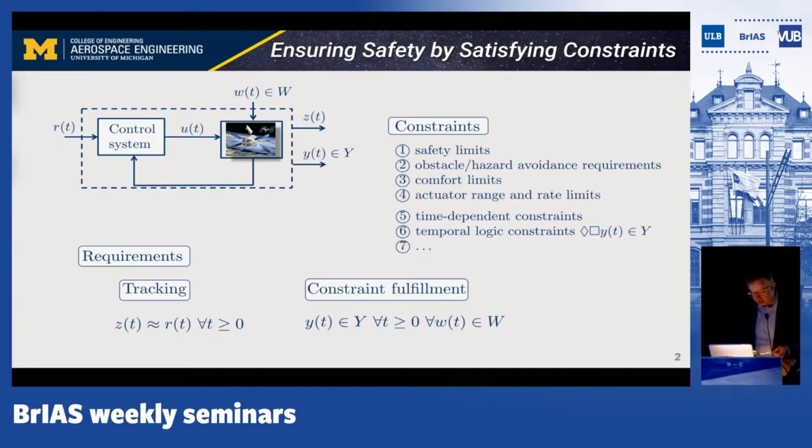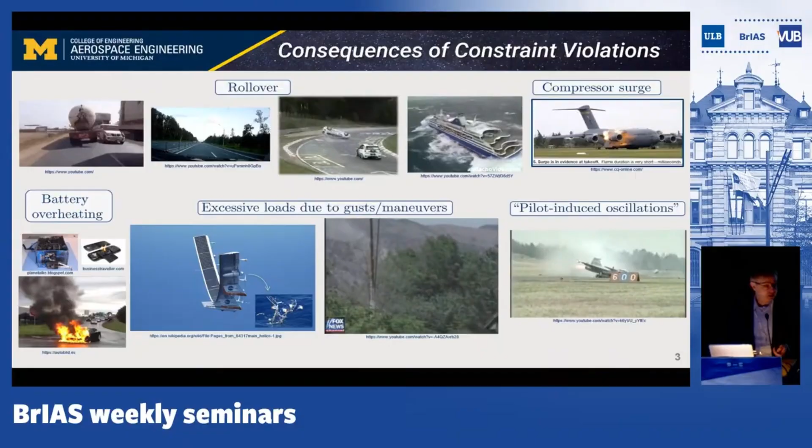Constraints can be more interesting too—they can depend on time in case of moving obstacles, or can be given by temporal logic expressions. We worry about constraints because bad things can happen if they're violated: cars and ships can roll over, aircraft engines can catch fire because of compressor surge, batteries can overheat, aircraft can disintegrate in flight due to excessive loads caused by maneuvers and gusts, and actuator control surface rate limiting can induce pilot-induced oscillations that can cause aircraft crashes—and that's what we would like to avoid.

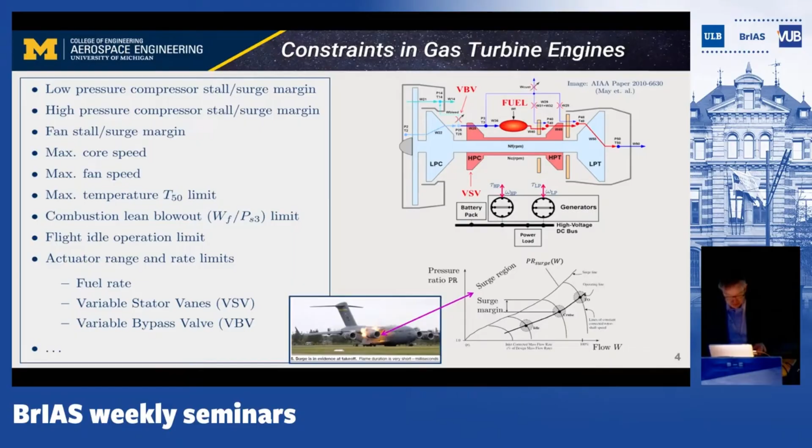If you take a flight, it's interesting that one system with many constraints is the aircraft gas turbine engine. There are surge margin limits, overspeed and over-temperature limits, combustion limits of various kinds, actuator range and rate limits. And as aircraft become more electric, you have to also worry about constraints in the electrical power system on currents, voltages, state of charge, and so on.

One of the most appealing tools developed in control theory for addressing constrained control problems is what's called model predictive control. In model predictive control, you generate control by solving a discrete time optimal control problem, so the feedback control law is obtained through optimization.

The way you enforce the constraints is by imposing those constraints as part of this optimization problem formulation. So the first element of this optimal control sequence that solves this optimization problem is assigned as your control action. So a couple of remarks here: typically you use iterative optimization solvers to find the solution, and you have to solve this problem in real time, and that's why computations are important.

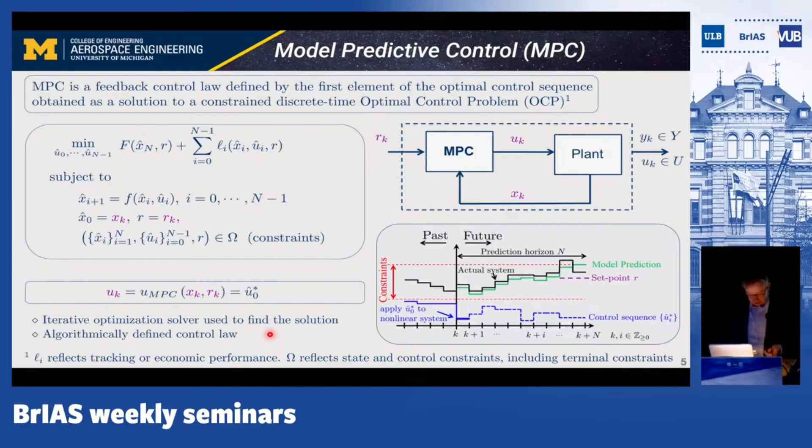Model predictive control has a long history. It emerged in the late 60s in academia and in the late 70s in industry, basically independently. It has been a vibrant discipline for academic research for several decades now, and it has been very successful in the chemical process industry, with increasing interest and adoption by other industries, notably automotive industry most recently. I showed a few examples where it was actually introduced into mass production.

Now, this is my introduction, and what do I want to do for this talk? First, I'd like to tell you a little bit about a few applications where we use model predictive control. Applications are always fun and give you a little bit more idea about some of the applied research that I do. And then the Achilles heel of model predictive control is in the computations, because you have to solve an optimization problem on board, and that's difficult. In fact, that's a major motivation for looking at alternative schemes, such as reference governors, a major area of research of Professor Garone, as well as barrier functions and control barrier functions that have become popular recently.

Hopefully, by the end of this talk, I'll convince you that there are a number of approaches to generate lightweight implementations of MPC that simplify the computations greatly. And so then you can take advantage of the fact that MPC is a very versatile framework that reflects performance objectives, handles constraints, and can have a low computation effort.

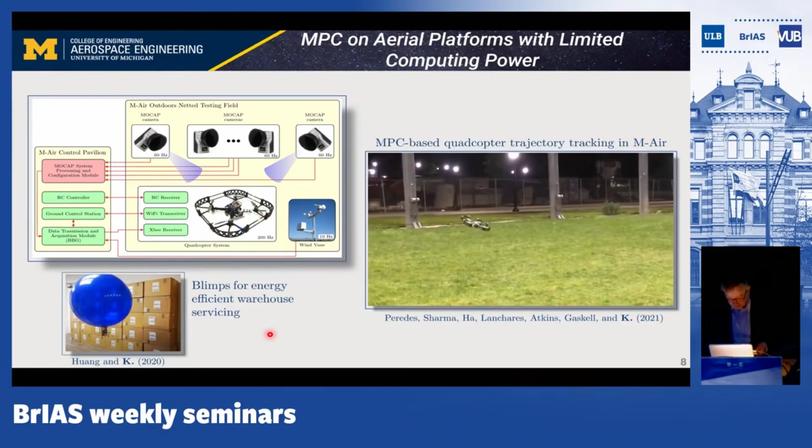Here is an even more significant challenge, both from a computational control standpoint, which involves control of aircraft with high aspect ratio flexible wings. Such aircraft are of great interest as high aspect ratio wings increase lift to drag ratio, and therefore they can improve fuel or energy consumption. You can also use them as high altitude, long endurance platforms, basically pseudo satellites. Unfortunately, these aircraft are also very flexible, and they can experience high deflections and loads as they are exposed to maneuvers and wind gust disturbances.

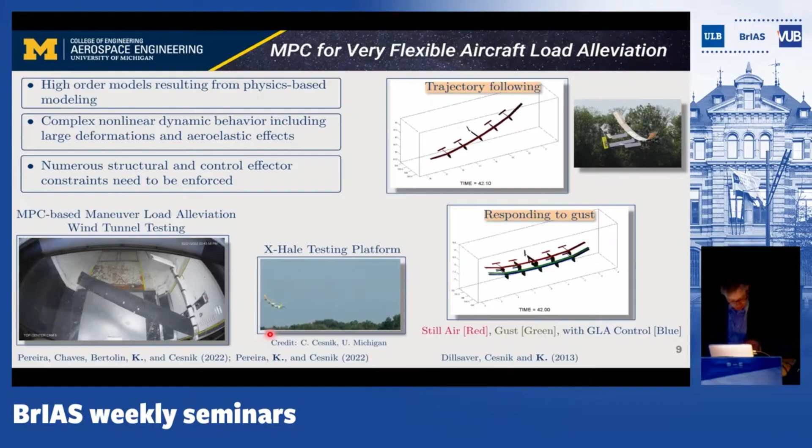MPC can also be used in spacecraft control applications, in particular for station keeping and rendezvous and proximity operations, notably on halo orbits in cislunar space between Earth and the Moon. To enable low fuel consumption during station keeping, there needs to be special formulations of model predictive control used, requiring accurate nonlinear models and non-standard choice of cost functions, which must be solved reliably on board the spacecraft.

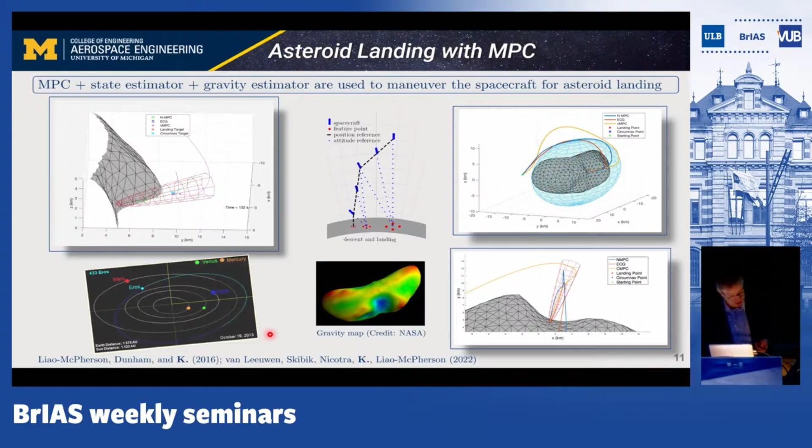We have considered the use of MPC to handle constraints in deep space applications, for example, for soft landing on asteroids, satisfying various constraints. If one wants to improve the ability to fly around and land on an asteroid, essentially without much knowledge of the gravitational field, MPC and adaptive control can be integrated together.

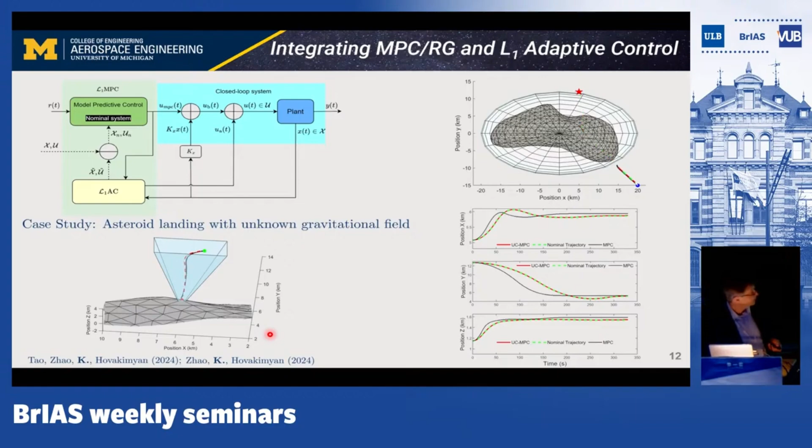I wanted to mention these developments because they happened under an AI planning grant from the National Science Foundation that Professor Bruno Sinopoli, who is the next speaker, has led. This work was in collaboration with Professor Pan Zhao and Naira Hovakimyan. Here we integrated L1 adaptive control to compensate for gravitational field uncertainty and model predictive control, as well as reference governors.

In other articles, another application for which we successfully exploited MPC involved the reduction in emissions of diesel engines, which are used to power trucks, ships, and interestingly, even some airplanes. The controller architecture that evolved was actually quite interesting, and it involved not a single MPC controller, but actually three of them.

Two of them were controlling the air path of the engine, basically the exhaust gas recirculation valve and variable geometry turbocharger. And the third MPC controller was an outer loop controller that would adjust the set points to these inner loop MPC controllers, as well as the fueling rate.

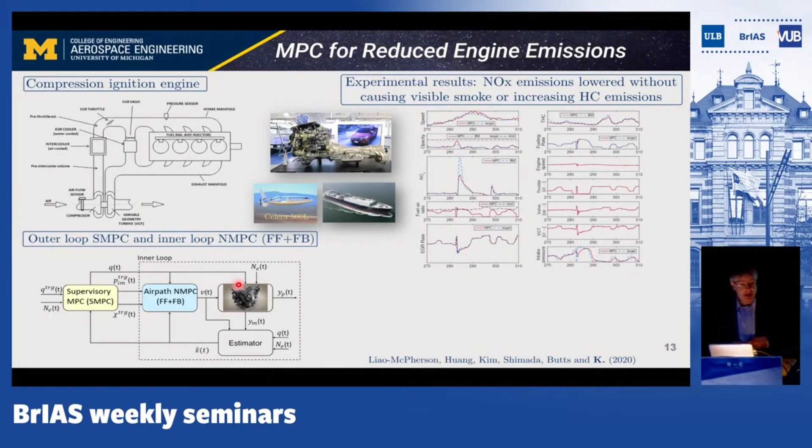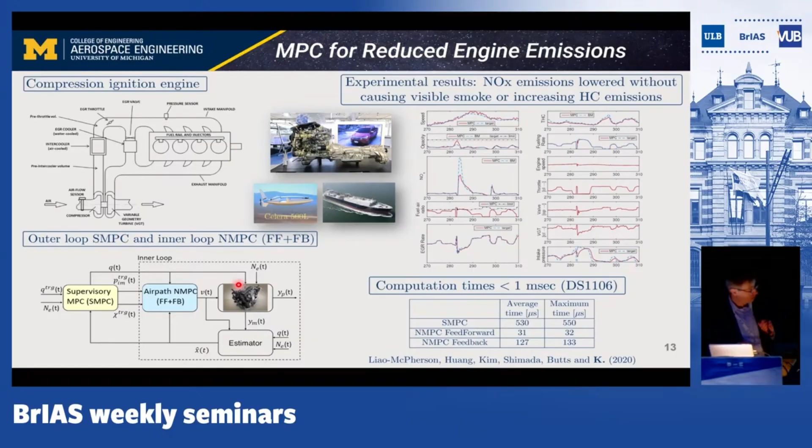While this architecture is quite complex, it enabled us to gain fairly good control over the engine transients, and we've been able to reduce transient oxides of nitrogen spikes, which is a difficult thing to do in diesel engines. What's interesting also is that, thanks to some of the ideas on the computational side I'm going to talk about, we've been able to maintain the total computation time for all three controllers under 1 millisecond per time step.

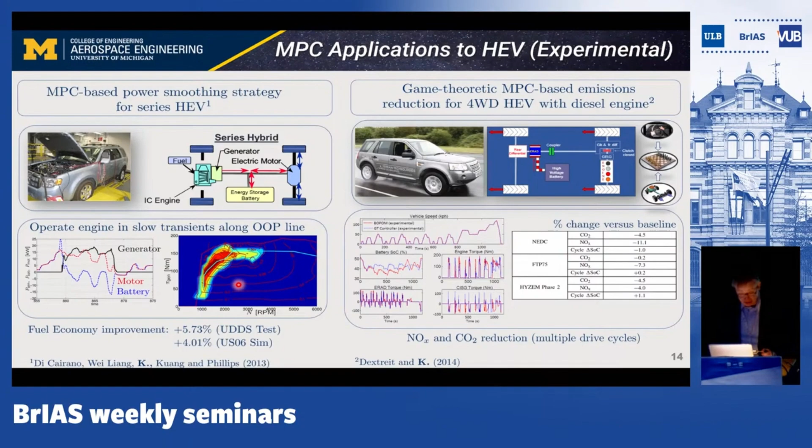There have been a number of applications we looked at to hybrid electric vehicles that exploited interesting ideas and interesting cost functions in optimization, including those based on game theory.

Broader use of game theory we also considered in applications to autonomous driving. Here what we worry about is interactions with human-driven vehicles, in particular in scenarios where an autonomous vehicle has to take into account these interactions. If the autonomous vehicle is trying to merge into very dense traffic where there are a lot of other cars, it has to nudge its way in. So you have to have predictive models that somehow account for the reaction of human drivers. Game theory provides a way of modeling these interactions.

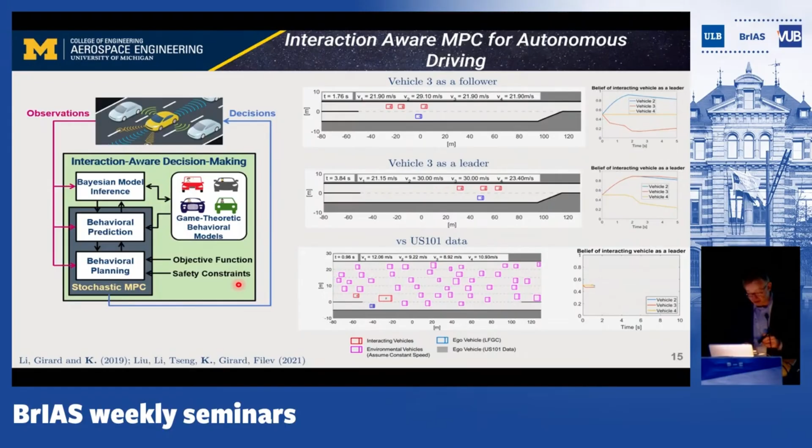What we typically do is we don't use a single game theoretic model, but multiple of them. Based on the history of interactions, a few seconds of interactions, we adjust the probability of each of these models being assigned to a particular vehicle. Then we use stochastic model predictive control to actually optimize the trajectory of our autonomous vehicle in such scenarios.

More recent work, I'm not going to dwell on it too much, but that included taking into account perception uncertainty. If you have a camera-based system, you rely on computer vision to drive in traffic. You have to account for uncertainty, for the errors in this perception system. That's a long-standing challenge. Also, perception systems are often based on neural networks, typically machine learning based systems. The other challenge is that you have to take into account...

Let's see if I can click. I don't think the video is playing.

That's okay. You have to keep into account what's known as out-of-distribution perception, meaning that you might encounter driving situations during regular driving which were not present when you trained your perception system. So we use deep ensemble type techniques to handle out-of-distribution perception. If this video was playing, you could see that we are basically testing, in an environment with rain and bad weather, a system that has been trained in sunny weather. This is in CARLA simulation.

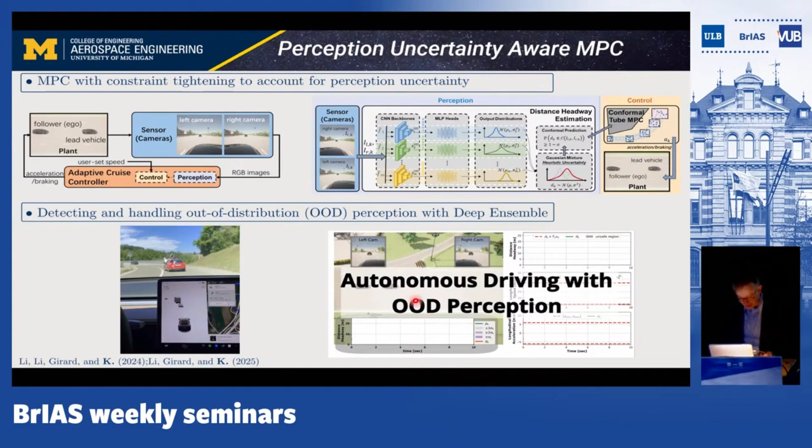Now, there was a very nice conference here last week on batteries. We've also been looking at battery control problems more from a higher level systems perspective, and on aspects that involve thermal management. Thermal dynamics in vehicles tend to be slow.

The temperatures don't change very fast. And what it means is that if you want to prevent the exceedance of limit on the battery temperature, and you have control over the cooling system, you have to pre-cool sufficiently far in advance to avoid this constraint violation, sufficiently far in advance of some kind of load increase or acceleration of the vehicle. So you need a long prediction horizon. You need to look long into the future.

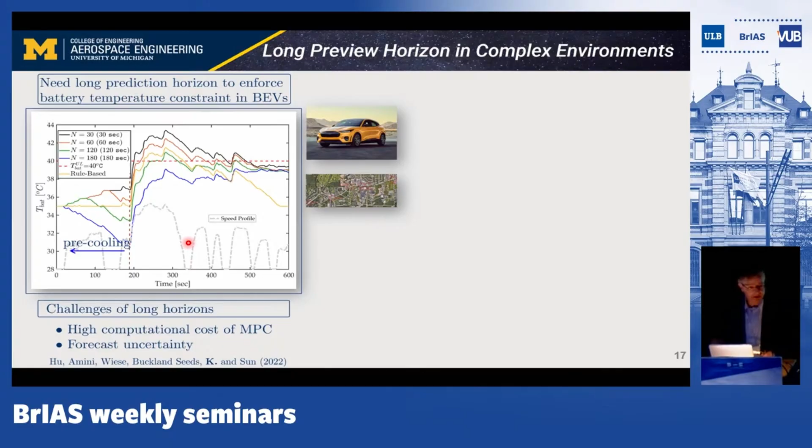And there are two issues there. One is that MPC has high computational cost. And the second is the forecast uncertainty. You need to know what the vehicle speed and what loads are going to be to predict the thermal loads on the vehicle. And you need to predict, say, the vehicle speed 5 to 10 minutes ahead to be successful. Initially, we were skeptical whether we can do this long-term prediction of vehicle speed, but it turns out, based on historical data, that if you combine queuing models for short-term prediction and then neural network and Bayesian network models for longer-term predictions, you can make good progress on this problem.

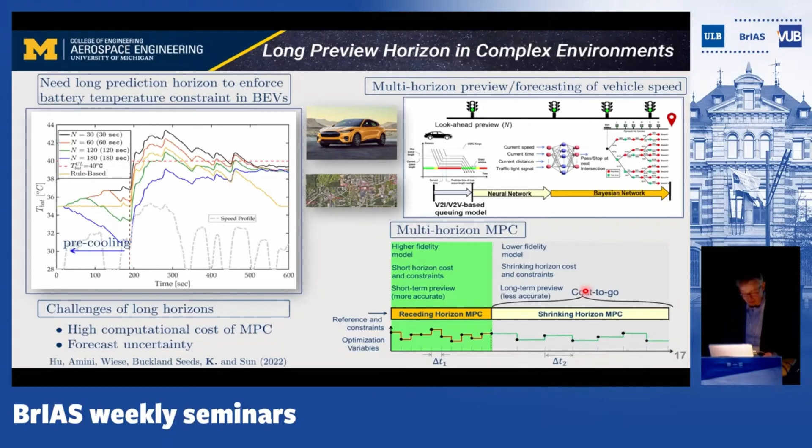Then you can develop special variants of model predictive control, what we call a multi-horizon MPC, where you have different phases: a receding horizon phase and a shrinking horizon phase. In the shrinking horizon phase, you can use a lower fidelity model, you can use less accurate preview, and that helps reduce the computational cost. We've done work developing this multi-horizon MPC formulation.

Now I've given you a few ideas about applications. Computation in all of them is a serious limiting factor in terms of the type of solutions we can deploy. We have to worry about the computations. And so the need to address this Achilles heel of MPC has motivated us to look more systematically into computations and model predictive control. I'd like to tell you a little bit about some of the research we've done in this area, broadly categorized into 3 different directions: 2.1, 2.2, 2.3.

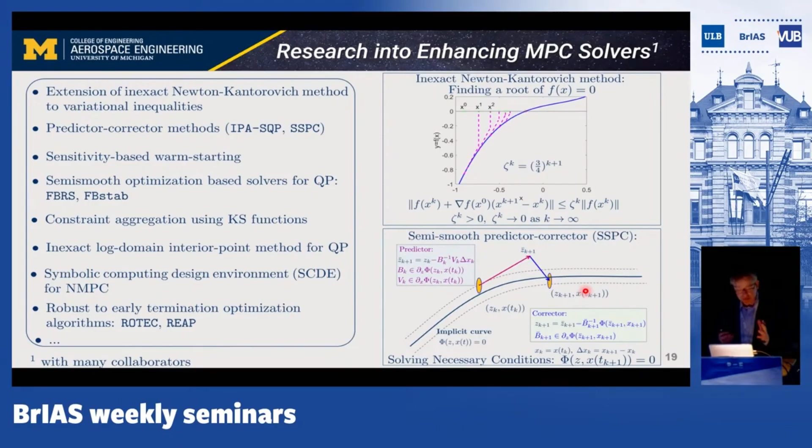Our first set of approaches was to look at developing solvers, computational solvers, specifically tailored for MPC problems. They would be faster, exploiting special features of these problems, taking advantage perhaps of warm start. This is work that involves many different ideas, work with many collaborators. I could probably give a number of talks on these ideas. I'll just briefly mention 2 of these developments.

One of them is what we call the inexact Newton-Kantorovich method for model predictive control. This goes all the way back to the classical Newton's method for solving nonlinear algebraic equations. So I have a smooth equation, f of x equals 0, and I want to solve it. How do I do it using Newton's method? You take a guess for the solution, x0. You linearize your nonlinear equation, solve the resulting linear equation, and that gives you another guess, x1. You repeat this process and converge to the root. That's the classical idea of Newton's method.

Now, it turns out there is a Kantorovich version of Newton's method where you don't relinearize. You just keep iterating with the slope computed at the initial point, or it could even be some approximate slope. It doesn't even have to be computed at the initial point, but the slope stays the same, so you don't have to regenerate the linearization. Furthermore, you don't even need to solve the linear equations to completion. You could solve the system of linear equations up to some accuracy, and you still get convergent iterations.

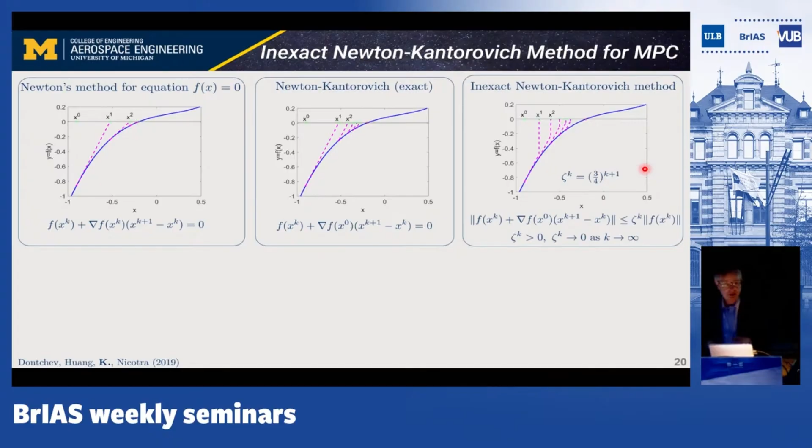In the setting of model predictive control, these ideas are quite appealing because often you have a pretty good idea what the solution might be from the previous time step if you use warm starting. You already computed your solution one step ago, so now you are recomputing it for the changed state, but the state didn't change a lot. So you have a pretty good idea about what the solution would be if you use warm starting. And so a few cheap iterations of this kind would be very appealing because you could improve the solution just enough to give you good control performance and satisfy constraints.

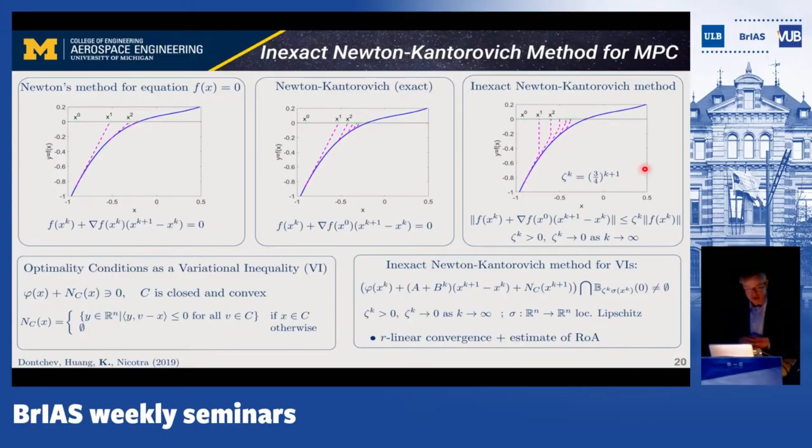Now there is a challenge: in model predictive control, it's a constrained optimization problem. So you don't have a smooth nonlinear equation. You have Karush-Kuhn-Tucker conditions for optimality, or the Lagrange multiplier rule from calculus, that you have to satisfy. And it turns out that is what's known as a variational inequality. One of the things we have done was to extend these ideas of the inexact Newton-Kantorovich method to the case of variational inequalities, deriving convergence guarantees as well as the estimate of the region of attraction.

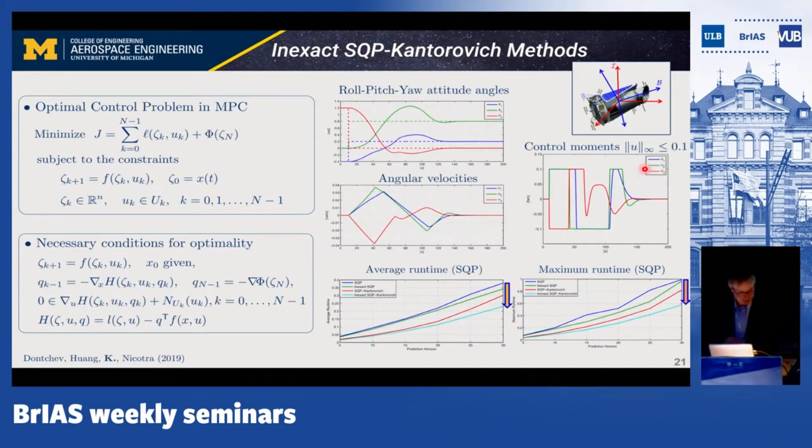If you apply these Kantorovich ideas in model predictive control, you could integrate them into sequential quadratic programming or into non-smooth Newton's method as well. You see a nice reduction in terms of the average runtime and maximum runtime. In this particular case, we use it for spacecraft attitude control with the control constraints.

Now, the other development I wanted to mention along this first line of research is a joint work with Professor Bruno Sinopoli, who is the next speaker. Here we look at continuous time primal dual flow algorithms, and a nice feature of them is that they guarantee feasibility with respect to constraints.

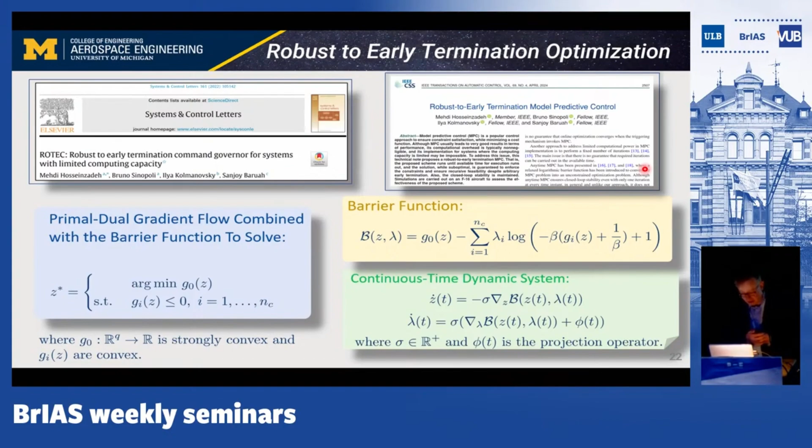So if you are in a situation where your time to compute the solution varies, you'd like to have an algorithm that's anytime feasible. You can stop it at any time, and the solution you have satisfies the constraints. Adding a few bells and whistles to this idea, you could also ensure that this solution can be stabilizing and ensure closed loop stability as well.

Okay, now let me talk about the second line of attack at computations in model predictive control. Suppose we are not able to solve our optimization problem to completion. Perhaps we are only able to perform a fixed number of iterations per time step. What happens? Could it be that maybe one iteration per time step is good enough and gives us good quality of the solution?

Let's say we are looking at a situation where we have a fixed number of iterations per time step, and we also use warm starting from the previous time step. Then our view of model predictive control changes.

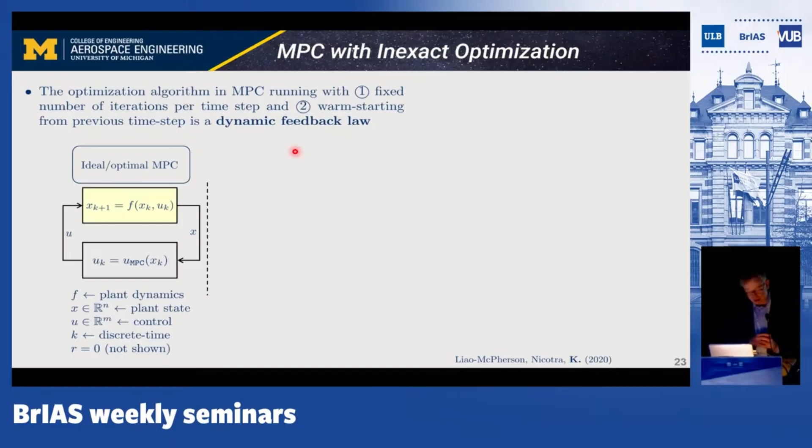So ideal optimal MPC, we typically think about it as a static control law. We take the state and we generate the control action. Now, if we do suboptimal MPC, using a fixed number of solver iterations per time step and warm starting, this control law becomes dynamic. So my optimizer becomes a dynamic controller that runs in parallel to my system.

So the state changes, I perform L iterations of my optimizer for this updated state, I spit out the control, and the state of the controller is the guess for my solution, for example, for my optimal control sequence. Then the properties of this interconnection depend on how many iterations per time step I'm able to perform.

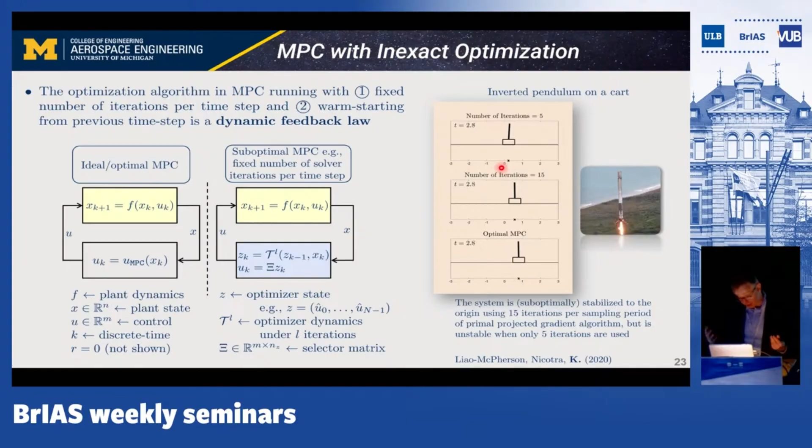Now, of course, this is a toy example, but these issues become important when you, say, try to land a SpaceX rocket that has somewhat similar dynamics.

Now it's possible to analyze this situation using a tool from control theory called the small gain theorem. The basic trick is to rearrange the closed diagram as an interconnection of an ideal closed loop system based on model predictive control and the optimizer error subsystem.

The optimizer error subsystem has an input as a change in state, and its output is the inexactness of the solution. So it's a disturbance by which your control action is performed. It's an interconnection of these two systems.

The other key step is to note that by increasing the number of iterations L that the solver can perform, the input-output gain, the asymptotic gain of this optimizer error subsystem, under reasonable assumptions, can be made arbitrarily small. So then you want the product of two gains to be less than 1, and so you can find how many iterations you need for the closed loop system to be asymptotically stable at the origin and locally input-to-state stable.

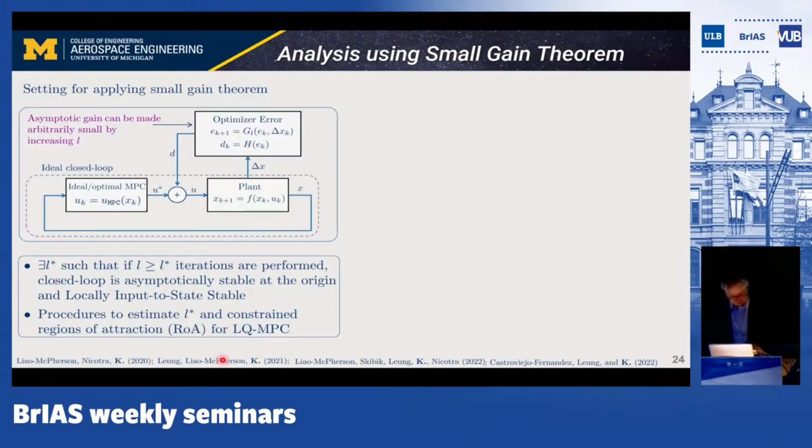You can also develop procedures to estimate this L star for certain types of problems, in particular linear quadratic MPC. The computations are quite tractable, as well as constrained regions of attraction. We've been exploiting these procedures in practical problems, including spacecraft pointing with reaction wheel desaturation, stabilization of vehicle dynamics, and others.

I should point out that the value of this bound, L star, and the number of iterations you need—these analytical bounds can be conservative. In other words, in practice you actually need fewer iterations to get a stable closed loop.

Now suppose you want to lower L star, what could you do? One thing you can do is increase the weighting on your control in your cost function, making control more expensive, and L star will actually decrease. So there are some interesting conclusions you can get.

Yes, please. Would it be a problem if you had to estimate the state? That's a good question. I think you can definitely analyze the situation, but we haven't done that specifically. We do have an ISS guarantee for that system, but I don't think we've made it specific to the state estimate necessarily.

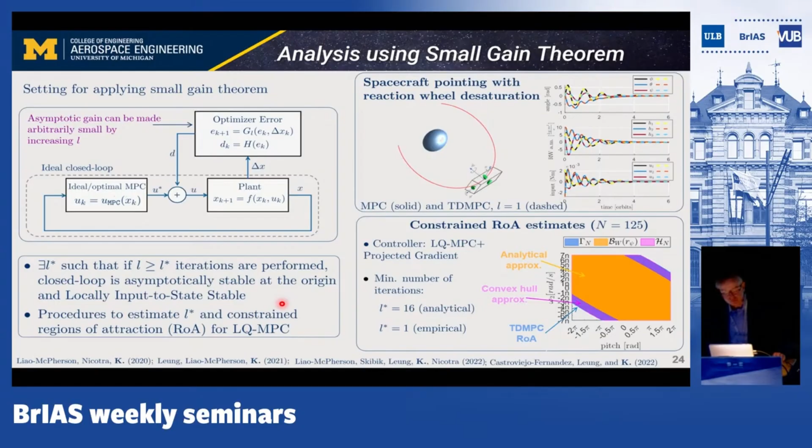Now here's a third approach to the issue of computation in model predictive control: suppose we want to solve our optimization problem to completion, but when does our solver really need a large number of iterations? When does L need to be large?

If your system is running in steady state and you're using warm starting, nothing changes much. The solution computed one step before is pretty good, and maybe you can improve it a bit using one iteration per time step so you have extra feedback. You don't lose the feedback, but that's pretty good.

So how do we deal with this? You simply don't want to apply the full step in the command. Maybe you apply a smaller step and then give it a ramp, and if you arrange things the right way, perhaps you could run the system with just one iteration per time step.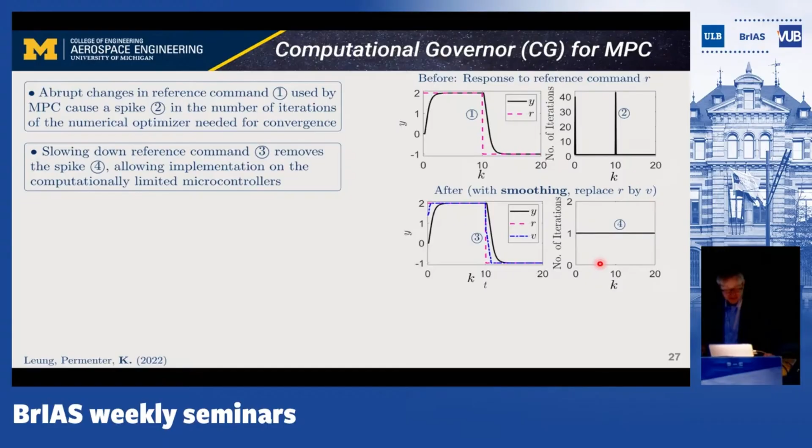This idea is closely related to reference governors, and we call it a computational governor. The idea is to minimally alter the reference command to enable the MPC optimization problem to be solved cheaply, efficiently, and reliably to completion. So I take my original reference RK, pass it through the computational governor, which alters it to VK if needed, so the model predictive controller solver can find the solution very efficiently. That's the basic idea—so how can we design this computational governor?

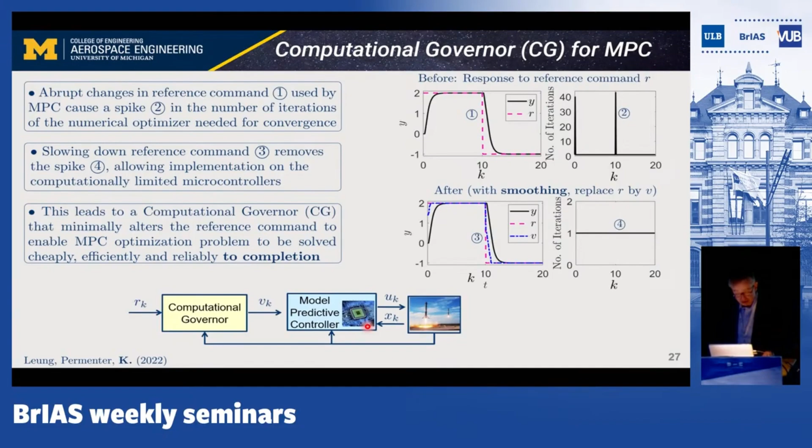I'll show you one development with some technical details so you can see how this can be set up. I'm going to look at a special class of model predictive controllers called linear quadratic MPC, where the cost is a linear model quadratic cost function on state and control variables. In such a case, the optimization problem you deal with is a quadratic program.

Here you have the control sequence that you're trying to solve for, and the constraints of this problem become linear inequality constraints. Theta is a parameter—it's a parameterized QP—and the parameter consists of your state xk and your altered reference, v sub k. So that's the setting.

Now how do you solve an optimization problem like this? You use Karush-Kuhn-Tucker conditions, the Lagrange multiplier rule. This is a stationarity condition: the gradient of the Lagrangian is set to zero. S is a slack variable by which you relax the constraints, B lumps L theta plus little l, and lambda are Lagrange multipliers that have to be non-negative—remember, slacks have to be non-negative too.

There's also a complementary slackness condition, where Si times lambda i has to equal zero. But numerically, we typically set it equal to a small number and decrease it as we address the problem—this small number is eta, which we have to decide on. Now, we don't like these KKT conditions because it's a system of both equations and inequalities, and I don't know how to apply Newton's method to inequalities. So what you do is a logarithmic transformation.

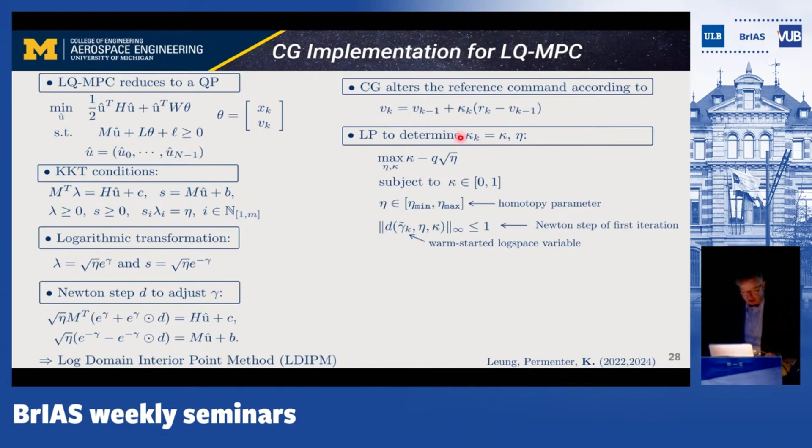Now the question becomes how to pick this kappa. It turns out that in this case, you have to pick kappa together with eta, the homotopy parameter, by solving a linear program. It's a 2-dimensional linear program, so it's easy to solve—there are very special fast solvers for that.

What you do is you want to maximize kappa, minimize eta, bring eta to 0 as much as possible. So this is the cost you're trying to maximize. Kappa is between 0 and 1, eta is within a chosen range. And the key constraint you need to satisfy is that the Newton step D here, in infinity norm, has to be less than or equal to 1.

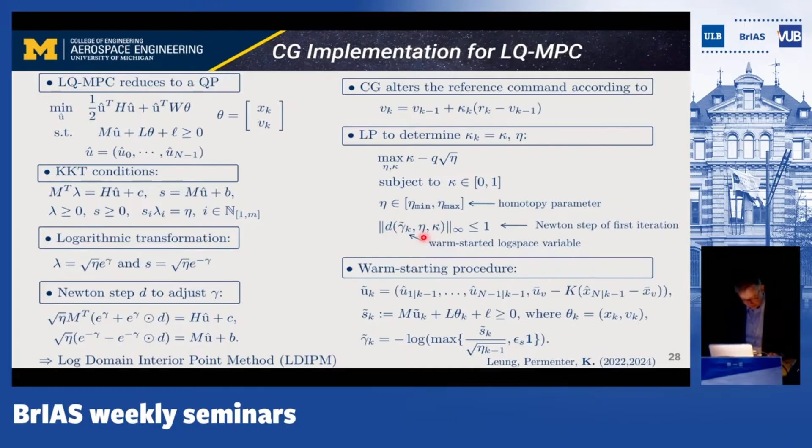So this is the Newton step of the first iteration, and this gamma-k-tilde is a warm-started log space variable—something we determine from the previous iteration. There's a particular warm starting procedure being used. It turns out that the Newton step D can be expressed as a linear function, or its infinity norm as a linear function of parameters. So indeed, this is a linear program.

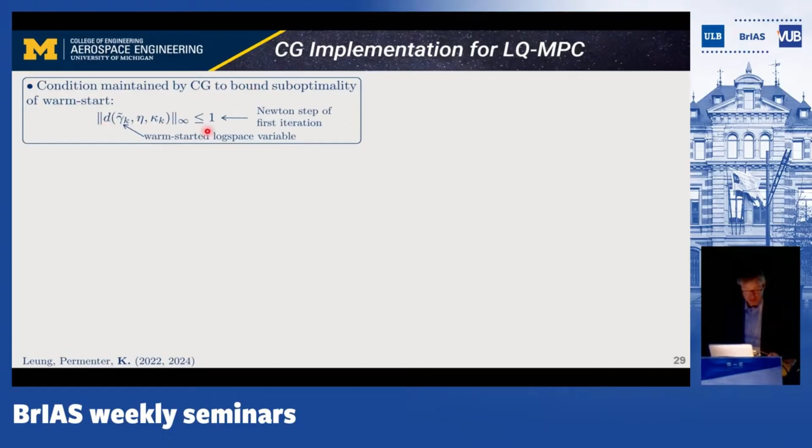Now why do we want to do this? We want to maintain the infinity norm of D to be less than 1, because then nice things happen. You can show that all subsequent LDIPM iterates are in the fast convergence region and guaranteed to be primal-dual feasible. So it has a similar property to the robust early termination algorithm I talked about, except this is now in the iteration domain, not in continuous time.

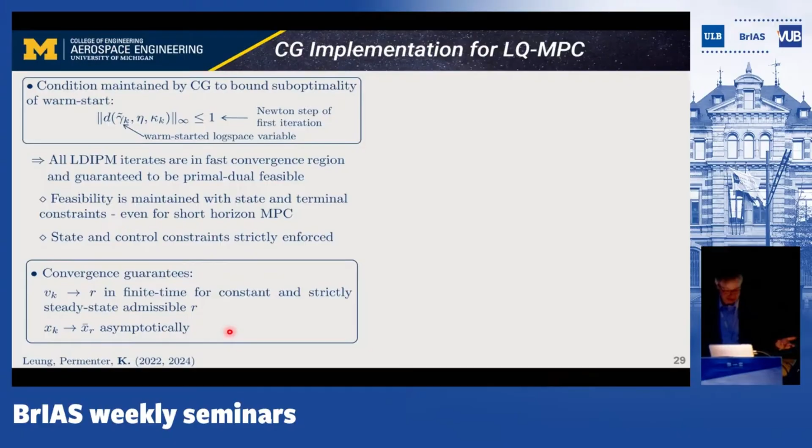And then feasibility—what does it mean to be primal-dual feasible? It means feasibility is maintained even if you have state and terminal constraints. And here, you could actually work with a short horizon MPC and that's okay too—state and control constraints will be strictly enforced. So the idea is that the computational governor bounds the suboptimality of warm start by enforcing this constraint. Through additional analysis, you can show that nice convergence properties, usual in reference governor theory, also hold for our computational governor.

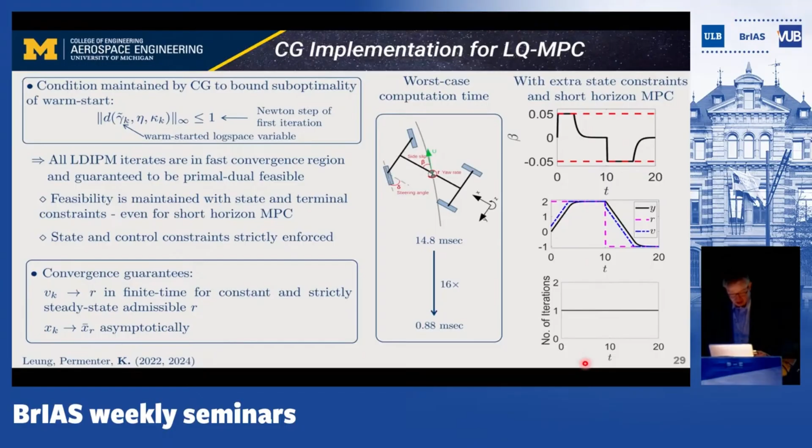What do we see in terms of computations? We're able to reduce the computations by an order of magnitude in the examples we look at. We can also run with short horizon MPC and additional state constraints. The region of attraction is expanded—that's not surprising, that usually happens with the reference governor.

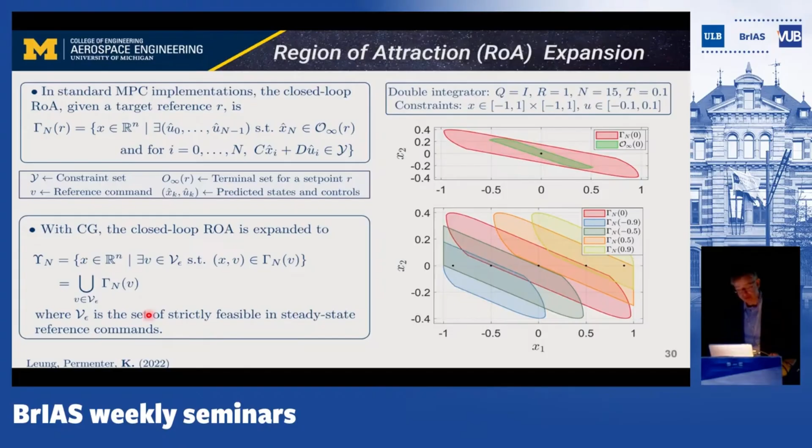But for conventional MPC, the region of attraction is the backward reachable set of your terminal region, and that depends on your reference R. When you use the computational governor, your closed loop region of attraction becomes a union of regions of attraction for different values of the reference. That's a nice result, but it's not surprising.

Some experiments in a lab: here we are running this inverted pendulum on a cart. There are two screens. This shows the modified reference command and original reference command, as well as the true reference command. On the other screen, we show the number of optimization iterations, and it's always equal to 1. So we are running with 1 iteration per time step, and you can imagine that in this case, computations are very, very simple, and we're able to satisfy constraints and do everything we want.

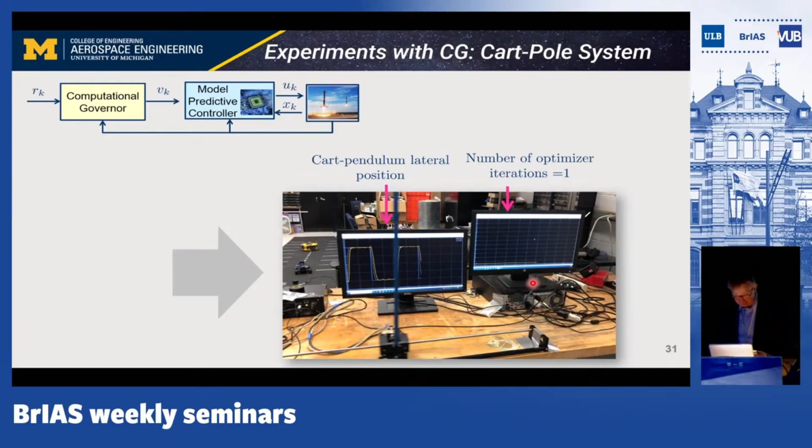To mention some additional and further work along these lines, we looked at this logarithmic domain interior point method, which is a nice way of solving quadratic programs, and we further developed it.

One thing we observed is that inside LDIPM, you have to solve a linear system of equations that I showed. Do you really need an exact solution of that? Could you live with an inexact solution? We typically solve it using conjugate gradients, but you don't need an exact solution.

So if you set up inexact conjugate gradients, this always has theoretical guarantees, but in a range of examples we've done in this paper, we have a reduction between 20 to 70% in terms of computation time. So this is what we call inexact log domain interior point methods.

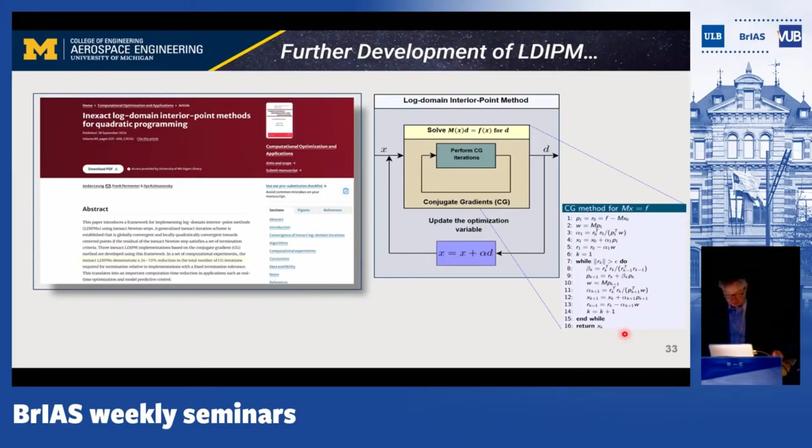I should point out that this idea of supplementing an MPC solver with some kind of supervisory scheme that keeps it happy seems very appealing, and we've been looking at a number of other ideas along this line, in particular something we call an iteration governor that not only modifies the reference command but also chooses the number of iterations a solver needs.

We have a stability governor that enables the use of short horizon MPC without terminal constraints and with a large region of attraction. Some versions of model predictive control use a preview, and we have a feasibility governor for preview-based MPC that facilitates implementation of such MPC with short prediction horizon as well as large region of attraction.

And then something we haven't converged on a name yet, even though we've published a couple of papers. I call it incremental reference governor, even though within our group we haven't uniformly agreed on a name. The idea here is that we're able to set up model predictive control based on a low fidelity model, and the reference governor then uses a high fidelity model to protect the solution against constraint violation.

So we can basically, and we can do other things that combine this idea of designing schemes and doing optimization on low fidelity models, but then making sure constraints are enforced on high fidelity models.

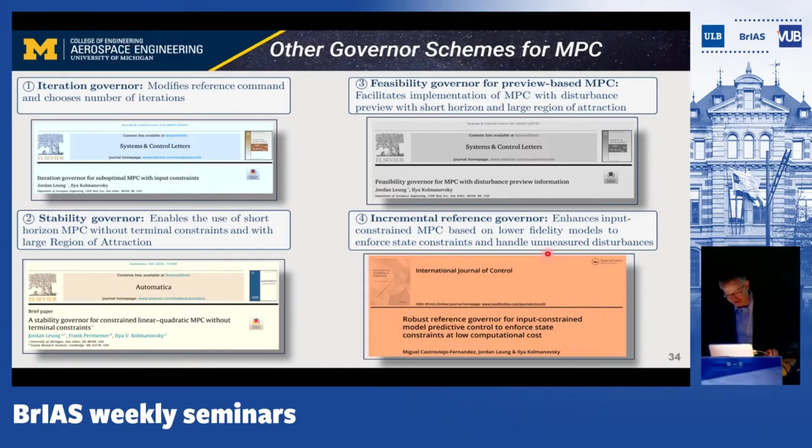Let me just show you very briefly the stability governor. That's a scheme that is also kind of interesting. And what is the issue here?

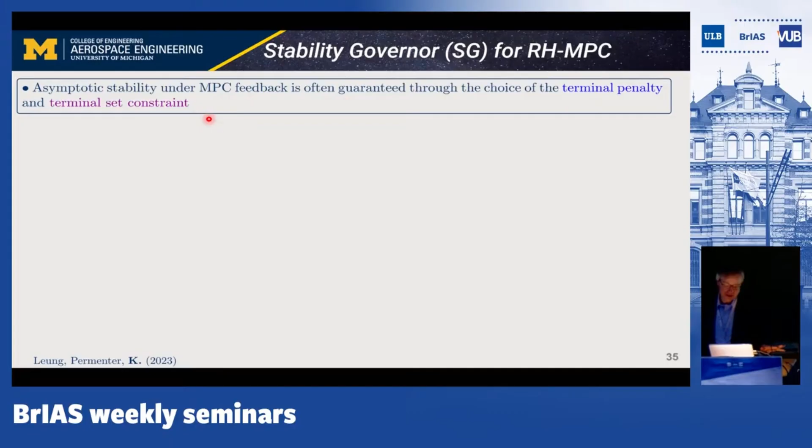Asymptotic stability under MPC feedback is often guaranteed through the choice of the terminal penalty and terminal set constraint. So if you want to rigorously guarantee closed loop stability, what you typically do is constrain your end state at the end of your prediction horizon to a terminal region, and you also have to use a terminal penalty.

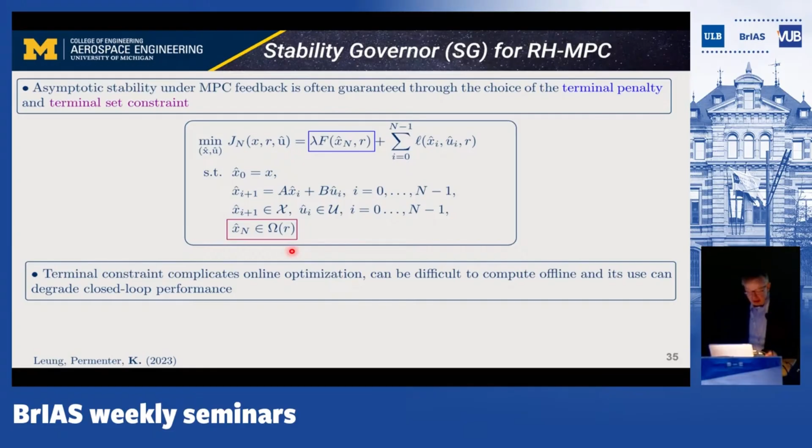Now that's okay, except that in practice this terminal constraint, shown in the red box, is not something practitioners like very much. For one, it's difficult to compute offline. It complicates the online optimization because it can be quite complex, adding additional inequality constraints to your problem, which could actually be nonlinear in principle. Also, its use can degrade closed loop performance because a lot of the control energy goes to satisfy that constraint. So people don't like it.

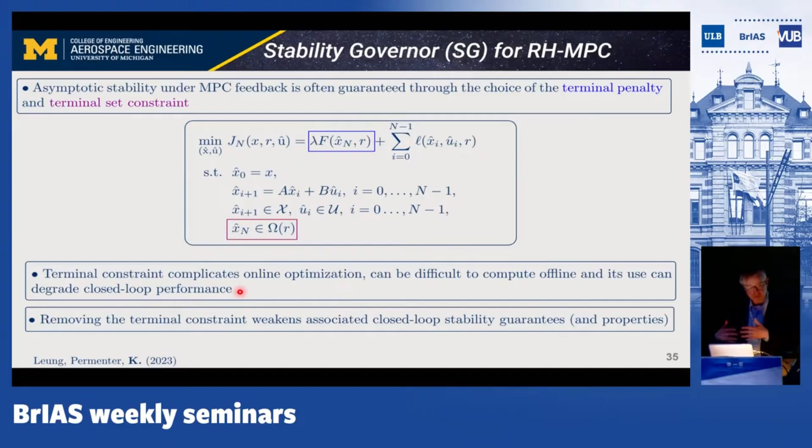Now, if you remove it, then it weakens associated closed loop stability guarantees, and in fact it also weakens other properties as well. So your region of attraction can decrease. So what can we do in this situation? Let's look at this closely. Let's just drop this terminal constraint and see what happens.

So I'm going to look at terminally unconstrained LQ MPC. Here I have the same problem as in the previous slide, but now I drop the terminal constraint. The other thing I've done is replace R, my reference, with V, because I'm anticipating using a reference governor-like scheme, and I will make this V different from R.

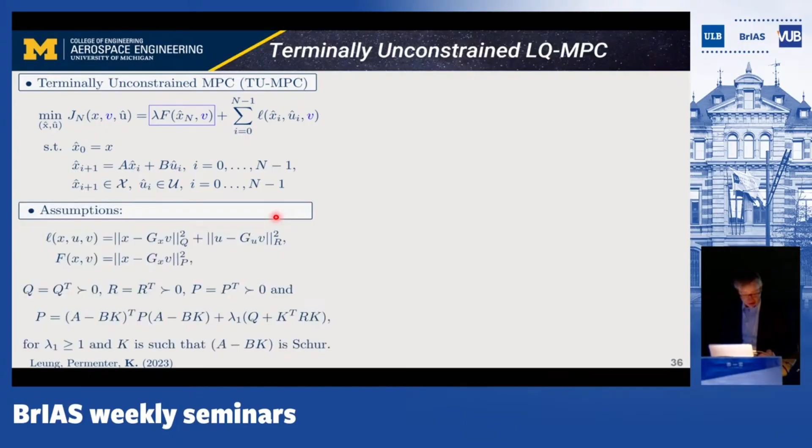Now, what happens for this terminally unconstrained MPC? If you look at the case of linear quadratic MPC, with quadratic cost function and linear model, it turns out you can show there is a region of attraction for this terminally unconstrained MPC, given by a sub-level set. This region of attraction can be computed as a sub-level set of your optimal value function. It's not surprising that sub-level sets of optimal value functions are regions of attraction.

That commonly happens in MPC, and it happens in this problem. The size of that set depends on a parameter alpha, and alpha is what we call the size of the implicit terminal set that you can define.

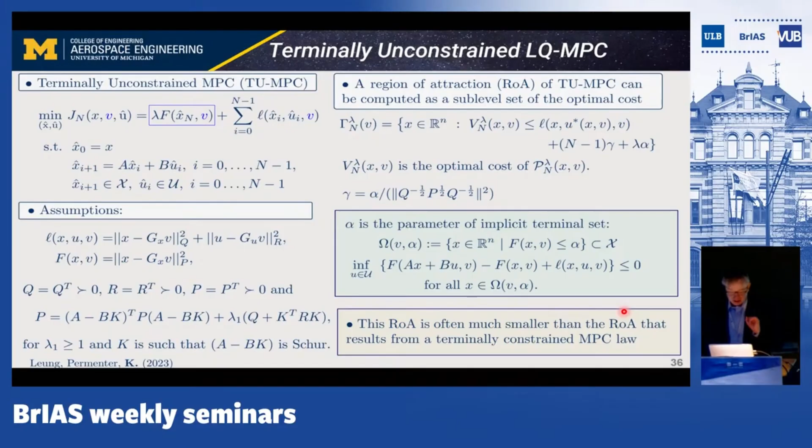There are a lot of details here that are not important, but the important part is that this guaranteed region of attraction is typically much smaller than the region of attraction that results from a terminally constrained MPC law. So we lose something. We have a guarantee that if we start sufficiently close, it will be stable, but it's a bit of a problem.

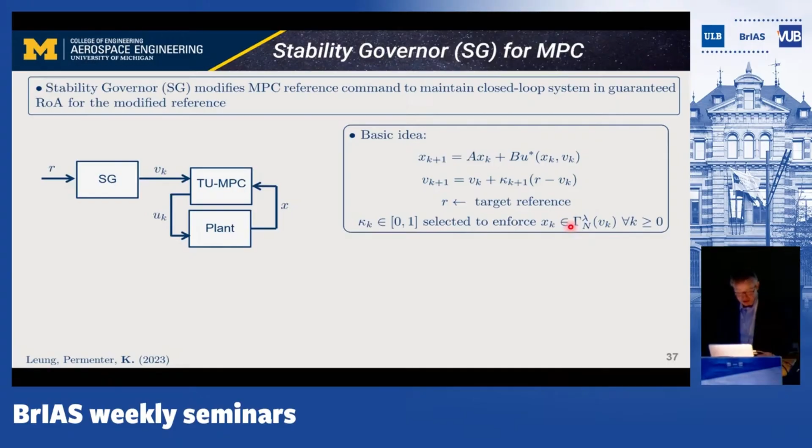So what do we do? We add a stability governor that's going to modify the MPC reference command to maintain the closed loop system in the guaranteed region of attraction for the modified reference. Our stability governor looks like a reference governor or command governor, but the constraint it enforces is a little bit different. It tries to maintain the state in the guaranteed region of attraction for unconstrained MPC, which is dependent on the current reference.

So this pair of the state and reference command have to satisfy this condition. That's the basic idea. And what we see is that this is going to maintain stability for shorter horizon n and smaller terminal penalty lambda. Terminal penalty is something that also people don't like.

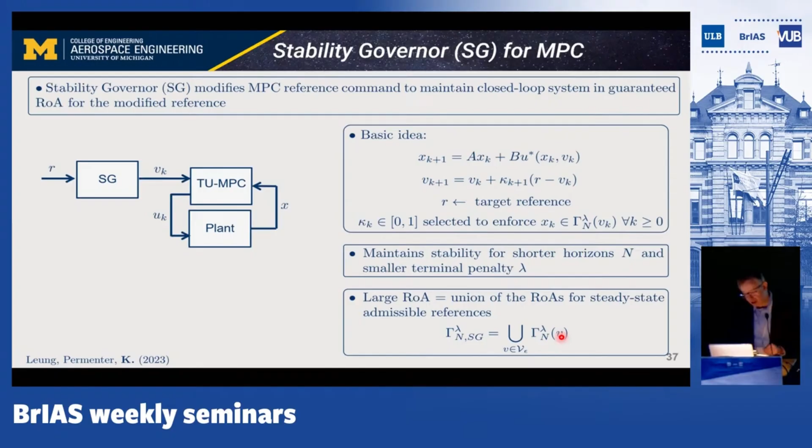And you get a large region of attraction because with reference governors, you end up with a union of regions of attraction for individual values of the reference. So that's not surprising — that's the basic idea. You can work out the details; I'll skip it in the interest of time. They're in the paper that we've published.

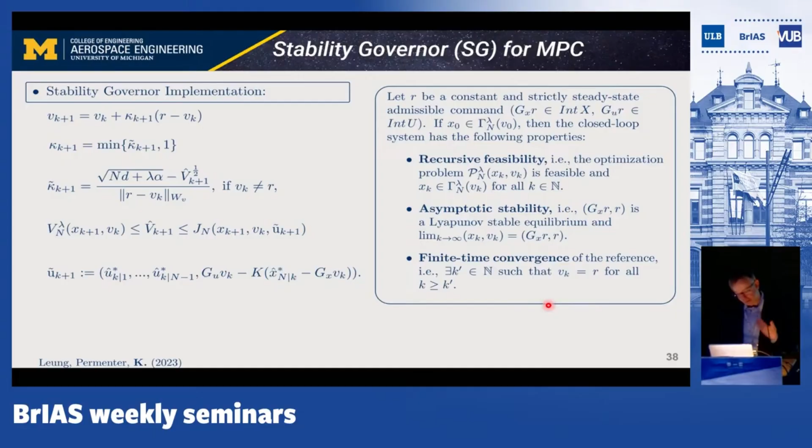But there is a way to generate an implementation where everything is explicit, and we're able to show recursive feasibility, prove asymptotic stability, as well as finite time convergence of the modified reference to the true reference. So these are the usual theoretical guarantees that you would expect in this situation that we've been able to establish.

Just to show a video, this is an inverted pendulum on a cart. Here you see there is a red point which corresponds to a command for the cart position, and the blue point is the modified set point by the stability governor. And n is the horizon.

So here I'm looking at the long horizon. Typically, the longer the horizon, the unconstrained terminal region of attraction is going to expand. But even with 85 steps, it's not enough — I'm starting outside of the region of attraction, and I'm losing stability.

If I do the stability-governed implementation, you can see I'm perfectly stable. In fact, I can reduce this horizon to 50. Of course, the motion is a bit slower. So that's basically what this does.

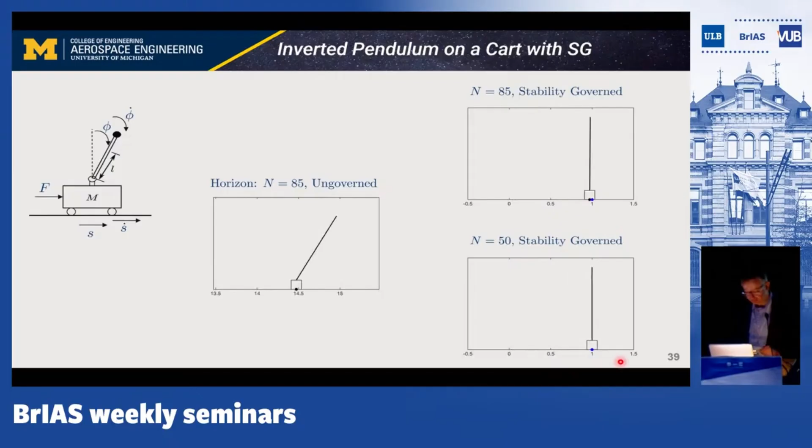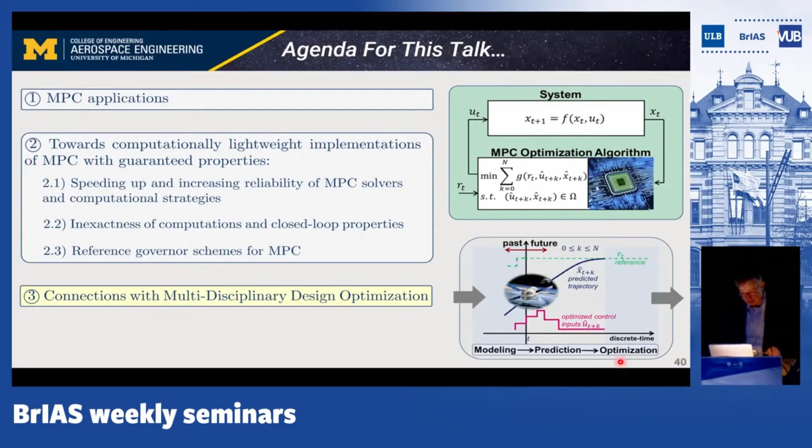All right, if I have time to briefly touch on the last topic — it looks like I get thumbs up, so I'll continue. Very briefly, I want to talk about connections with multidisciplinary design optimization, or more specifically with something we call control-aware design optimization, where the problem is a bit different.

What we are trying to do is look at design, in particular design of vehicles like aircraft, or supersonic aircraft in our specific case study. And what we realize is that when we optimize its design parameters, for example the wing shape, we often optimize it for things like fuel burn, takeoff weight, and range of the aircraft. But there are also important characteristics of this aircraft that have to do with its ability to perform maneuvers.

For example, I want to be able to take off and land. I have to be able to follow the glide slope when I'm landing, and if I'm hit by a disturbance, I should still be able to follow the glide slope within the prescribed limits. So that problem, because the maneuvers depend on control, is somehow coupling the design aspect and control aspects together.

And so the question is, can we somehow define a control-agnostic approach, ideally, that ensures vehicle controllability — the ability to perform these maneuvers — in the system design phase? So simultaneously optimize parameters while guaranteeing that there is a control that is going to do the job.

Turns out that such problems can be reduced to bi-level optimization, where you're trying to minimize a function of design parameters, for example wing shape, subject to a constraint on the value function of an inner loop optimal control problem, where this inner loop optimal control problem gives you the cost of your maneuver. And if you use a penalty function, if the maneuver doesn't exist, then this penalty function will be basically very large.

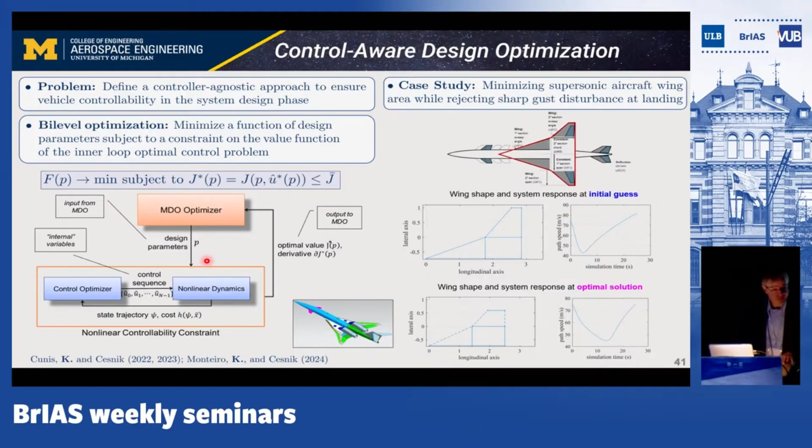Now, what happens in the picture on my left is that we have a parameter here as well. This is the design parameter, and it doesn't vary according to the dynamics of the plant, but according to the dynamics of the MDO optimizer. Otherwise, at this lower level, it's a very similar picture. So what does this suggest? It suggests that some of the same tools we use in control theory to analyze the picture on your right can be exploited for the problem of bi-level optimization and control-aware MDO.

Notably, we can take advantage of small gain theorem and input-to-state stability to establish convergence guarantees of inexact bi-level optimization algorithms. This basically means we don't have to wait for the control optimizer to converge while iterating on the design parameters. We can accept inexact solutions here.

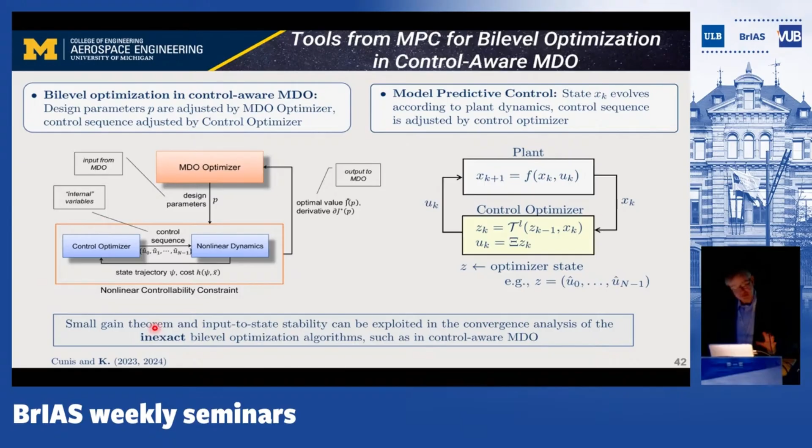Now, can we make this precise? We've done a bit of work along these directions. In particular, if you look at the inner loop problem as a linear quadratic optimal control problem in discrete time, which depends on this parameter p, and then under assumptions on the cost in the outer loop, we can look at the bi-level proximal gradient algorithm, perhaps the simplest algorithm of this kind.

We look at iterations in the parameter as well as in the control, and we can show that there exists a bound on the number of iterations in the inner loop such that if you perform at least that many iterations, the whole algorithm will converge to the solution. So we end up with a convergence guarantee, and again, these convergence guarantees are obtained using the small gain theorem.

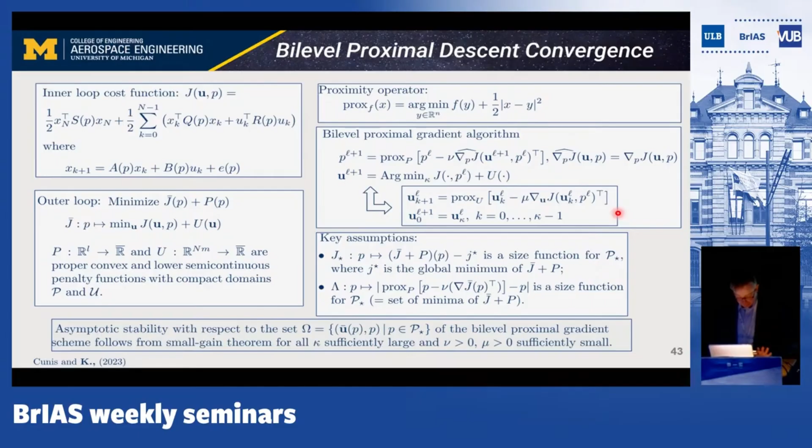Recently, we've been expanding this work, and in our inner loop we now allow the alternating direction method of multipliers, ADMM. The nice thing about ADMM is that it allows us to handle equality constraints in the inner loop as well, and it has a number of other properties. So we now have a complete theory for that.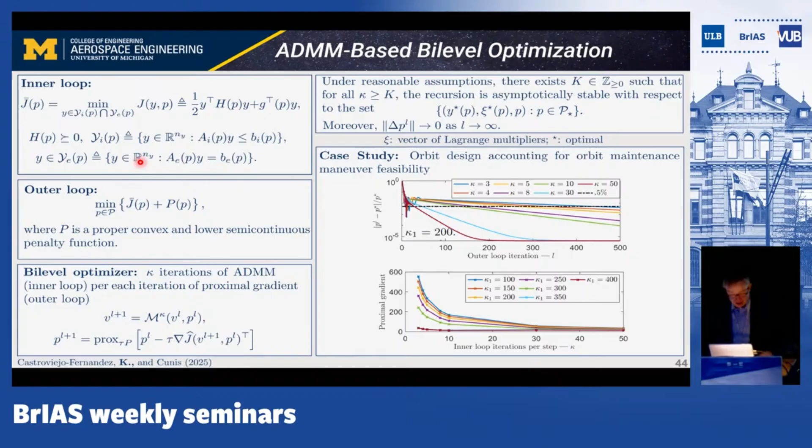In a more fundamental way, from the perspective of the outer loop optimization problem, what are we doing? We are basically doing some kind of gradient descent where we rely on inexactly computed gradients, and we are able to establish convergence guarantees to the solution in this setting. That seems to be an interesting idea, how to apply the small gain theorem in other settings of this kind.

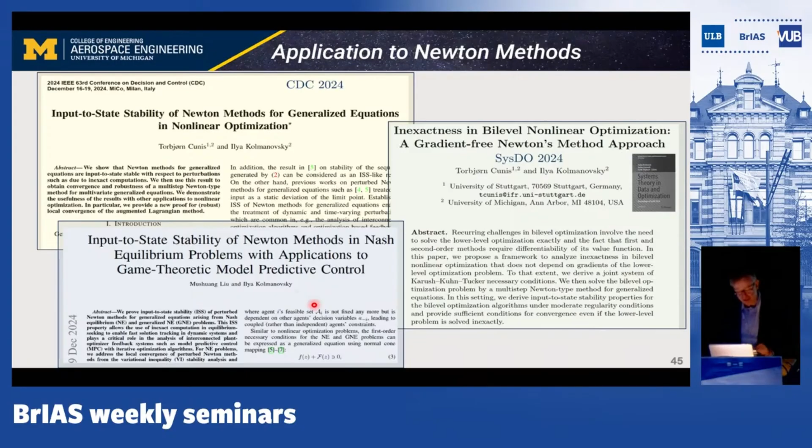There have been a number of papers we started to write, in particular for Newton's method for generalized equations, inexactness in bi-level nonlinear optimization. We call it gradient-free in the sense that it allows the use of inexact gradients, and even some problems in game theory—for computations in game theory we can exploit these ideas.

So that brings me to my last slide with a few closing thoughts. I talked about computations and model predictive control, and it's clear that inexactness of computations in MPC is going to affect closed-loop dynamics and closed-loop properties. We can derive bounds on the number of iterations to ensure closed-loop stability with receding horizon MPC.

I haven't talked about shrinking horizon MPC. In shrinking horizon MPC, the end time of your maneuver is fixed, so the horizon shrinks every time you approach your end time. This is of interest, for example, if you try to do some kind of landing or waypoint-following problem. It turns out you can also do similar analysis for shrinking horizon MPC and get various bounds on the number of iterations you need.

Supervisory schemes for MPC can be developed that improve reliability of MPC with short horizon, reducing computational time and expanding the closed-loop region of attraction. I think I mentioned at the end that analysis of inexactly solved bi-level optimization problems in MDO can benefit from control-theoretic tools such as the small gain theorem.

And finally, I should point out that much can be learned from treating application problems in different domains. It's a rich source of challenges, but also ideas of various things you can try, some of which can actually lead to interesting theoretical developments. And I'll stop here.

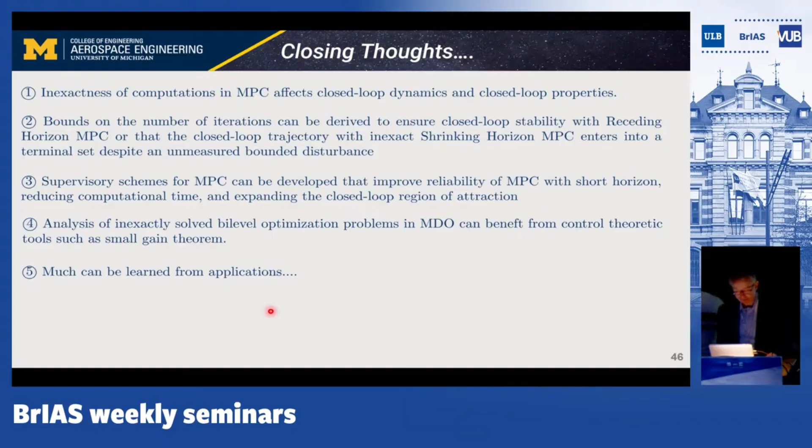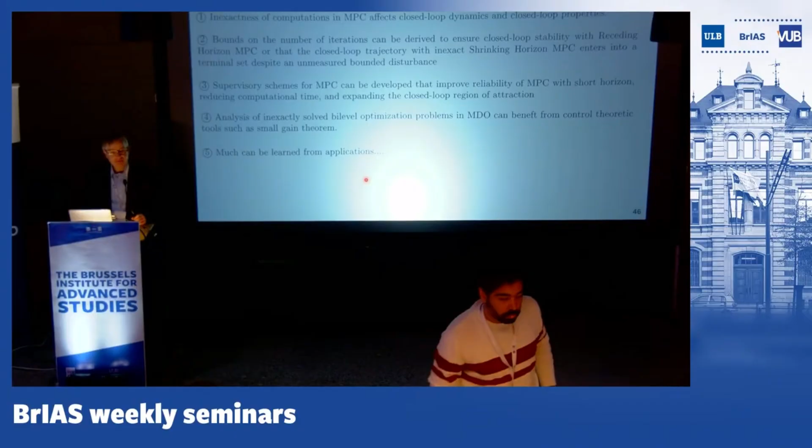Thank you for the very nice, interesting presentation. I was wondering, when you calculate L star, the minimum number of iterations you need, I think I probably missed some details about the guarantees you get and also the problem setting. Is persistent feasibility included in the guarantees you get?

Let's just say, the current results: there are two different types of results. The existence of L star can be established in a more general setting than specific bounds on L star. For the specific bounds of L star, we typically look at linear quadratic MPC with control constraints. That's the easiest case to analyze, in which case the issues of recursive feasibility are very easily satisfied because you only have control constraints.

As a next step, you can establish a region of attraction, or a region such that if you start from that region, then all other guarantees, including recursive feasibility, will hold. So that's the current state of the results.

I'll be very happy to show you, I have 3 slides to show actually how we estimate L star based on linear quadratic MPC. I think you said that, right? But the price you pay is that the region of attraction gets just smaller, right?

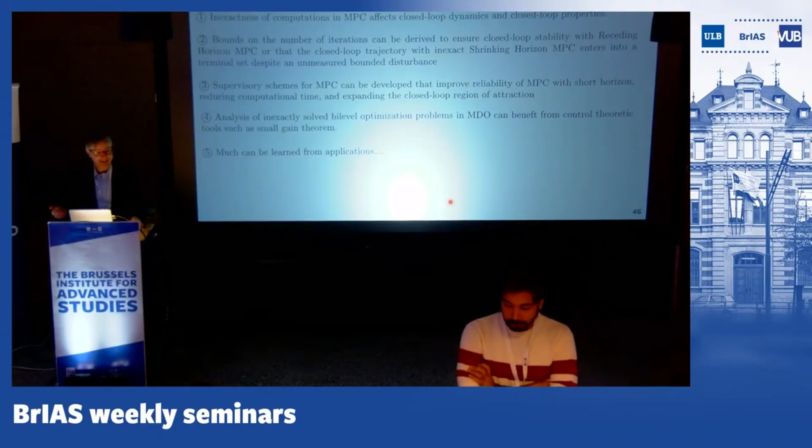We've been looking at this problem, but some non-intuitive things happen, at least with the type of bounds we are currently using. Roughly speaking, what happens is that you need to have a contraction somewhere. In a linear setting, with linear models and quadratic cost, things start to look more and more linear, so you either have something less than 1 or not. I think in nonlinear problems, you can have more interesting behaviors.

Thank you. Other questions?

Well, I will make a question for which I already have an answer, but just to provoke you a little bit: are we sure that with the technological increase of availability for what concerns computational power, it is still relevant to look into reduction of the computational cost of MPC?

I think it depends on the applications you consider. As I said, if you look at quadcopters at the moment, they are fairly computationally limited. That question has to really be answered in strong connection between the applications one might have and the computational hardware.

I should also point out that speed is one aspect of this whole area of research, how quickly you can compute the solutions. But the other one is reliability of computations, and that becomes important especially when you deal with nonlinear MPC problems, because you can have all the time in the world to compute, but if you converge to the wrong solution, that doesn't do you any good.

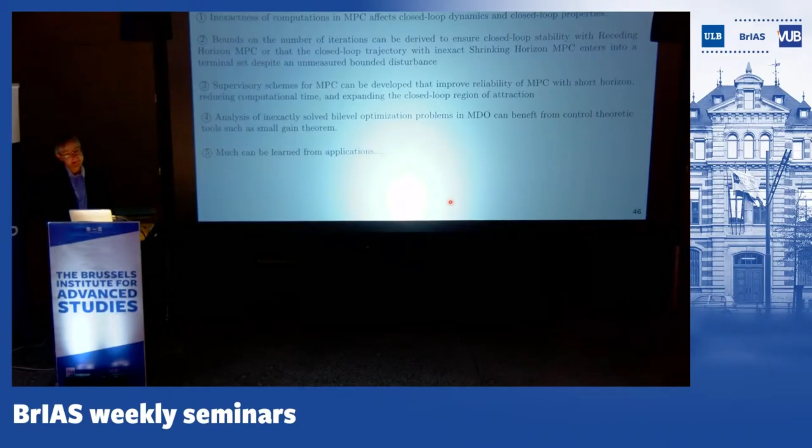So you stressed a lot about the impact of the inexactness of computations, right, with regard to stability and other properties. Is there any work that relates the explicit MPC kind of results to stability, for instance? Which addresses also the question that Emanuele asked—when you don't have the computation, you might just rely upon storing the solution and then just having to retrieve it. Is there any relationship between stability results and the coarseness versus the fineness of this?

Yeah, there has definitely been work on trying to understand if you have an explicit solution and you have approximation errors, could this translate into instability? And I have to remember the references, but I know where to find them.

Yeah, well, my memory on recall is not great, but yes, this work has been done.

One thing I should point out is that when we started looking at these ideas on the automotive side, around 2000, it appeared that explicit MPC was the way to go, because it's easier to certify—you know exactly what the computation time is.

But what transpires is that when your computer stores the solution, the solution can be quite complex. Even in linear quadratic MPC settings, you have a lot of these polyhedral regions as well as gains. So the time to go through these regions to find the right one for higher order systems, maybe with 4 or 5 states already, can exceed the time to perform a few iterations of online optimization.

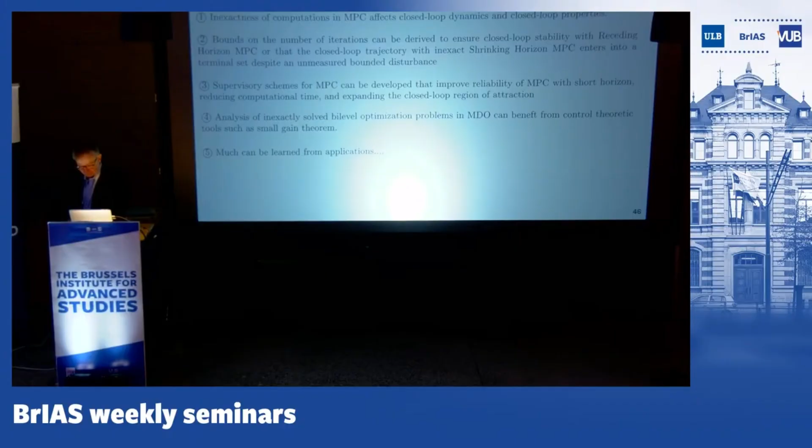I'd like to say one last thing, reporting a private conversation between me and Ilya, if he allows me—though he doesn't know what I'm going to say. Two years ago, when Ilya was here with us for a month as a visiting researcher, he went back home and I remember we had a call. He said that when he left Brussels and arrived home, he felt like he'd left a familiar place, and he'd be very happy to come back again. I hope he'll say something like that again in a few days when he's back home, and that we can have him again as a guest here. Absolutely, I predict that will be the case. And again, thank you so much for organizing the program—it was a real pleasure to be here. Thank you to you, Ilya.